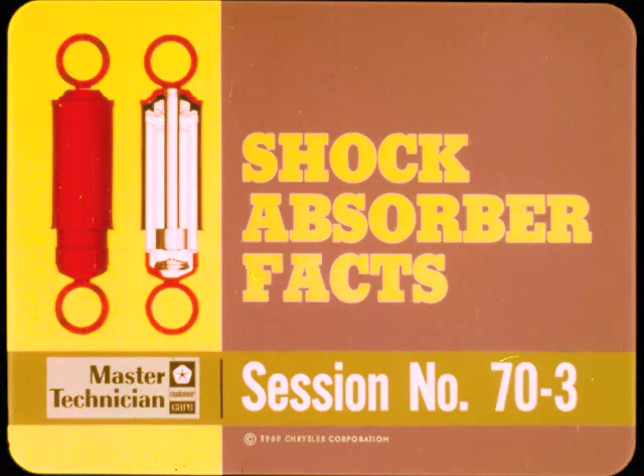Fellas, this month's session should have a little more bounce to it than usual. We're going to cover the subject of shock absorbers, probably one of the most misunderstood parts of the suspension system. Nick is going to give Fred a thorough lesson in the theory of operation, testing, and servicing of shock absorbers. I think Nick's about ready to start, so why don't we join them and maybe learn a thing or two ourselves?

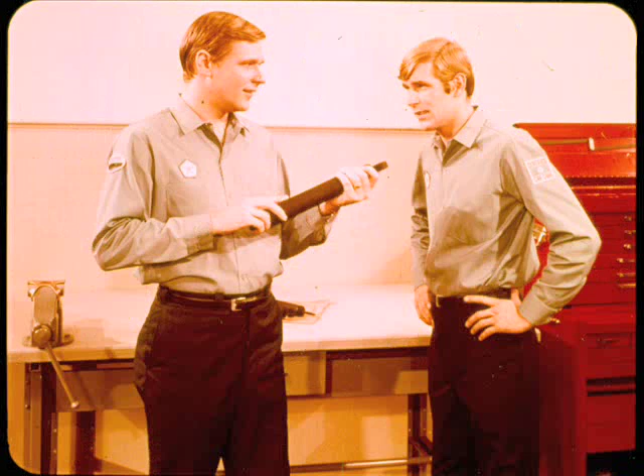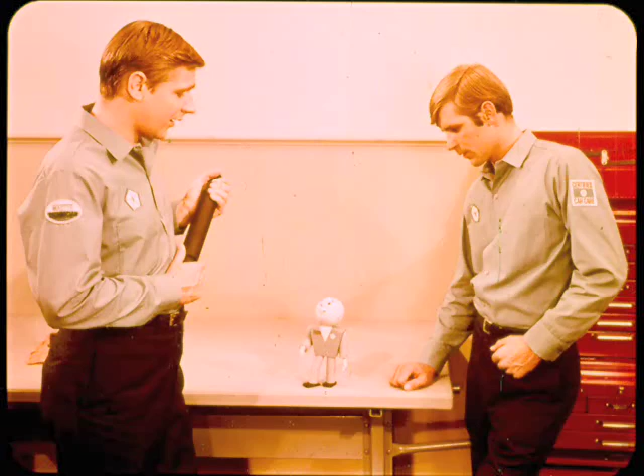The shock absorber is really not a complicated part, Fred. It's just that most people don't really understand what the shock absorber does, how it works, and how to test and service it. Hi, Tech. I'm glad you came along. If you're up to your usual stuff, I'm sure I won't leave anything out. And I'm sure you've got your ready supply of warnings and helpful hints. That's why I'm here, Nick. So you can continue with Fred anytime you're ready.

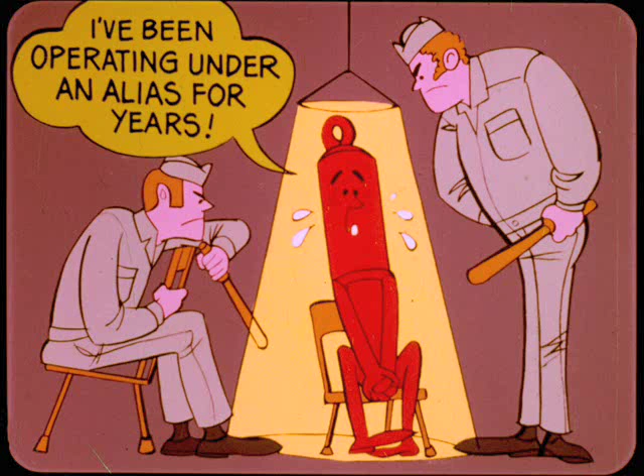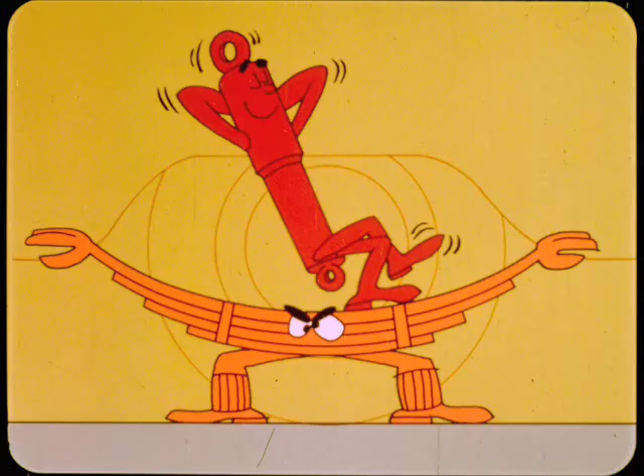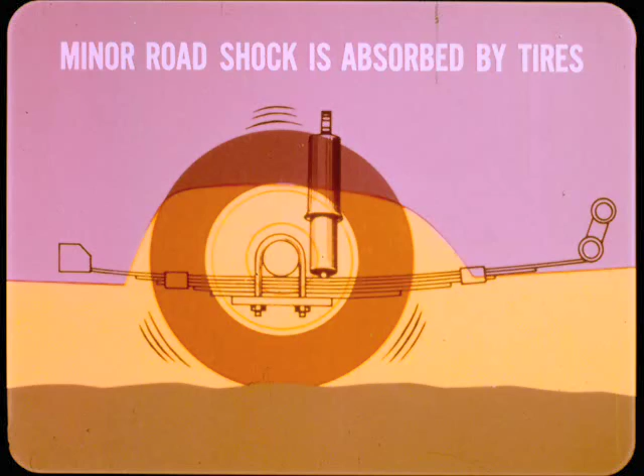Okay, Tech. I think the first thing to clear up is some of the wrong ideas a lot of people have about shock absorbers. For all practical purposes, the shock absorber doesn't live up to its name. It really doesn't absorb shock at all. On the other hand, some owners think that if a shock absorber is damaged or has lost its fluid, the car will sag. We all know that the shock absorber does not support the weight of the body. This is done by the rear springs and front torsion bars. Although some of the minor road shock is absorbed by the tires, the suspension system does the main job of absorbing road shock as the wheels roll over bumps or into holes in the road.

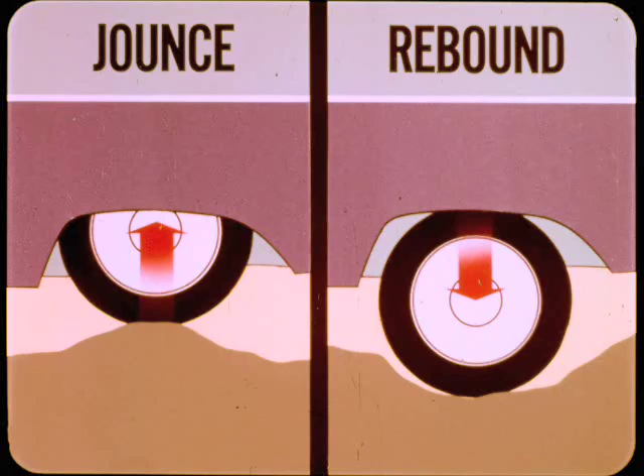Basically, there are two spring movements that occur when the wheels hit any irregularities in the road surface. If the wheel moves upward toward the body, it's called jounce. When the wheel moves down, away from the body, it's referred to as rebound. Jounce and rebound occur whenever enough force takes effect to flex the spring.

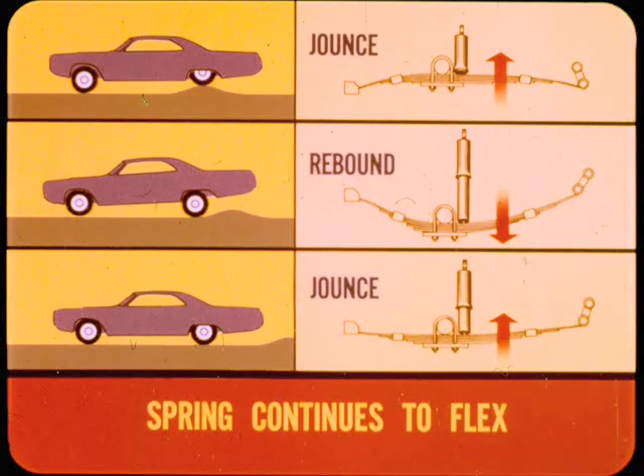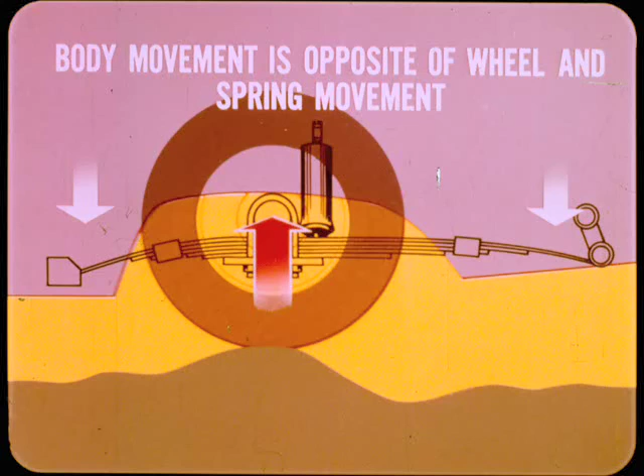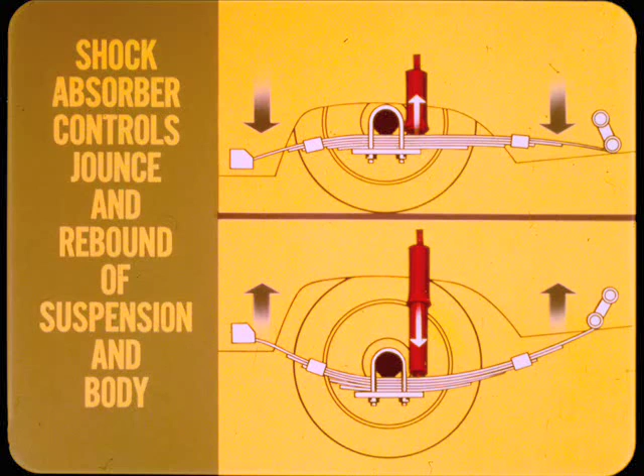The spring continues to flex in opposite directions until the force is completely dissipated. If a large enough load is applied to the car suspension, the spring reaction is transmitted to the body. Body movement is, in most cases, opposite of wheel and spring movement. When this happens, the weight of the body then adds to the spring action and makes bouncing even more difficult to control. Controlling suspension and body movement is the real job of the shock absorber. The shock controls the jounce and rebound of the car's suspension and body. It acts as a hydraulic snubber to dampen spring action and retard body movement.

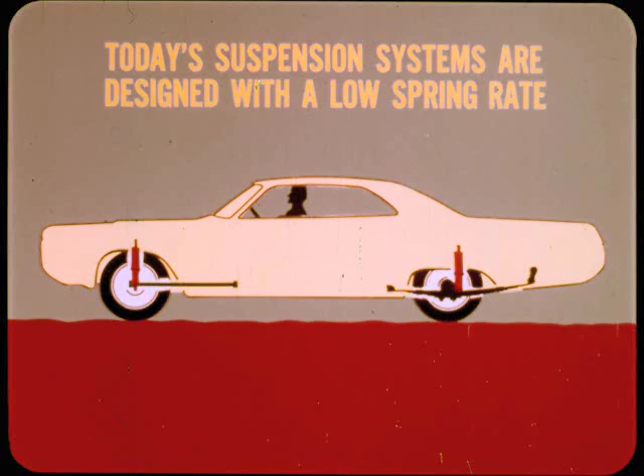Today's suspension systems are designed with a low spring rate to give what is generally referred to as a soft ride. A low spring rate simply means that it doesn't require much of a load to flex the spring. On smooth pavement, today's standard springs are flexible enough to allow the wheels to follow slight irregularities without transmitting their movement to the car body as a road shock or harsh ride.

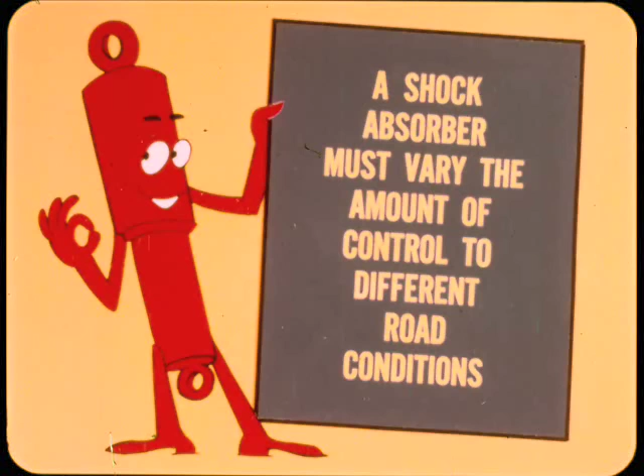Well, with a low spring rate, won't the car bottom if you run over a good-sized bump or a chuck hole? You're right, Fred. And that's why shock absorbers are so important to today's suspension system. The shock absorber must not only provide snubbing control, but must also vary the amount of control to different car speeds and road conditions. A modern piston-type hydraulic shock absorber is designed to automatically provide the right amount of resistance for all normal road conditions.

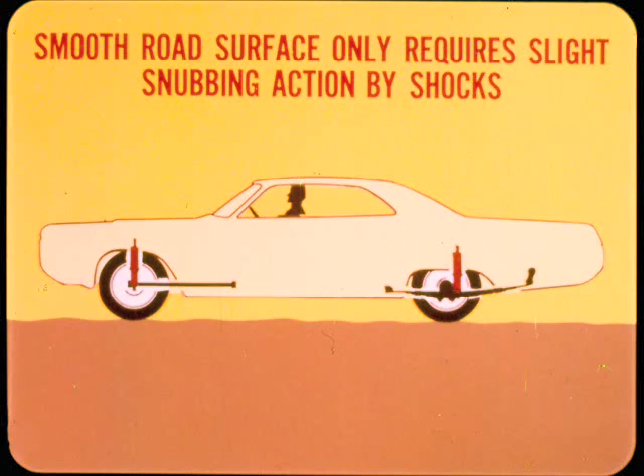For example, a smooth road surface only requires slight snubbing action by the shocks. Therefore, on smooth pavement, suspension and body movement is slight. Nevertheless, it is necessary. Obviously, rougher road surfaces require stronger snubbing action by the shocks to keep body and suspension movement under control. The shock absorbers must automatically increase their resistance many times more to cushion or dampen the increased spring action. You know, I can't understand how the shock can adjust the amount of resistance or the snubbing action to the amount of spring action.

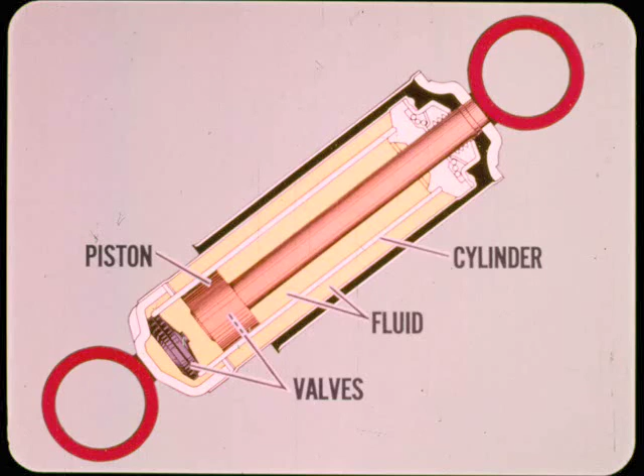I was just about to show you exactly what happens inside a shock absorber, but I'll answer your question first, and then you can see how it's done. A shock absorber is basically a piston within a cylinder filled with hydraulic fluid. The action of the piston forcing fluid through a restricted passage or valve achieves the damping effect. The damping effect is caused by the back pressure built up as the fluid is forced through a small opening. The pressure builds as the velocity or speed of the piston increases.

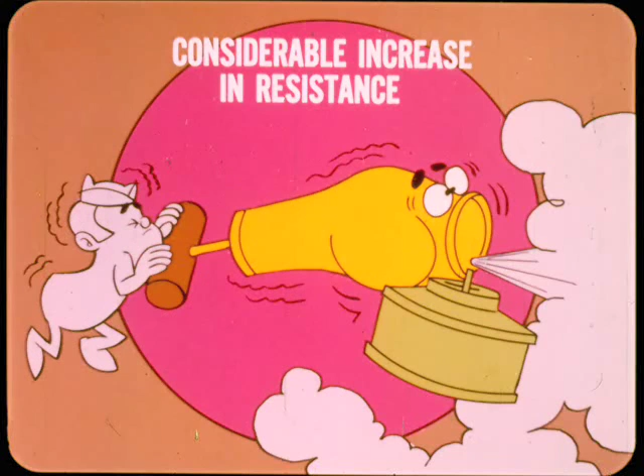The best comparison of this is a hand-operated bug sprayer. If you pump the handle slowly, there's very little resistance. On the other hand, if you pump the handle a number of fast strokes, you'll be able to notice a considerable increase in resistance. The shock absorber functions pretty much the same way. The faster the piston moves, the more snubbing action you get from built-up pressure or resistance.

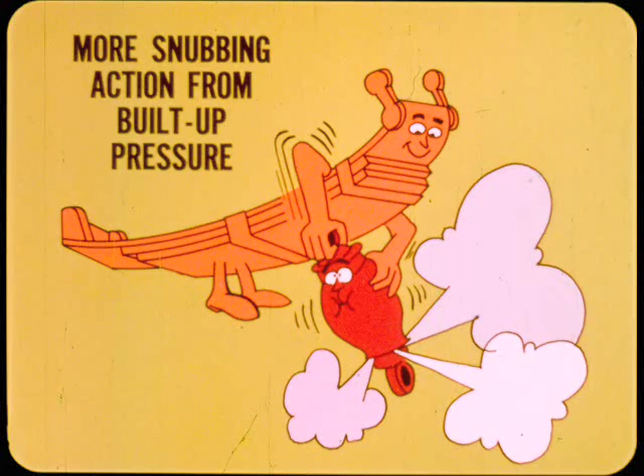Before we go any further, let's take a look and see if I still have that cutaway shock absorber. We'll start with the body of the shock.

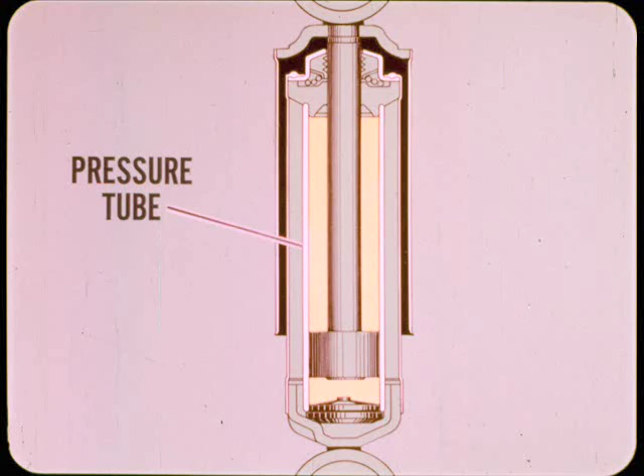The body of this type of shock absorber usually consists of 3 concentric steel tubes. The innermost is the pressure tube where the actual snubbing action is performed. Incidentally, the inside diameter of the pressure tube is the same as the size designation of the shock.

The second one is the reservoir tube, which holds a supply of fluid, and the outer one is a shield to protect the extended piston rod.

In some cases where the piston rod extends into a protective housing, a shield is not attached to the shock. This usually occurs on front suspension systems rather than rear.

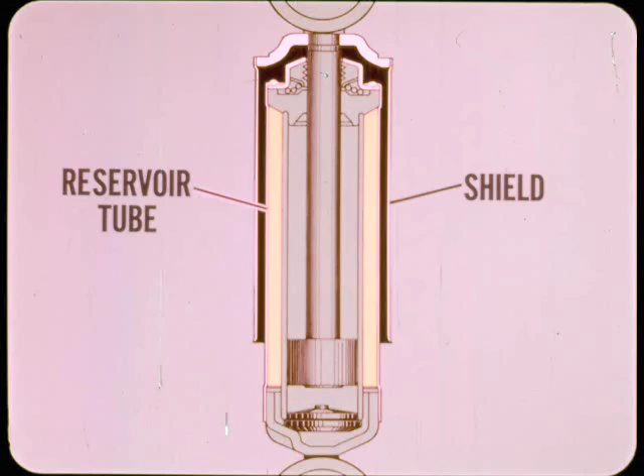At the bottom of the shock is a ring or mounting eye welded to the reservoir tube for connecting the shock to the rear spring clamp or lower control arm on the front. The top of the shock can have either a mounting eye or a threaded stud.

Internally, of course, there's the piston rod and piston. Piston movement is what forces the fluid through the valves to produce the snubbing or damping action.

There's an oil seal above the rod guide at the top of the shock. The oil seal prevents leakage from the pressure tube and maintains pressure within it.

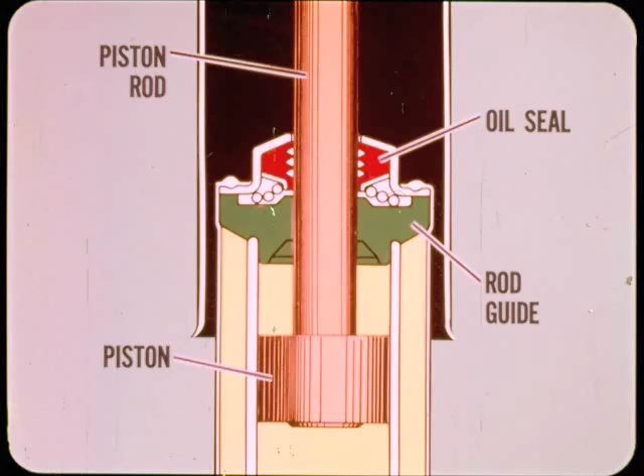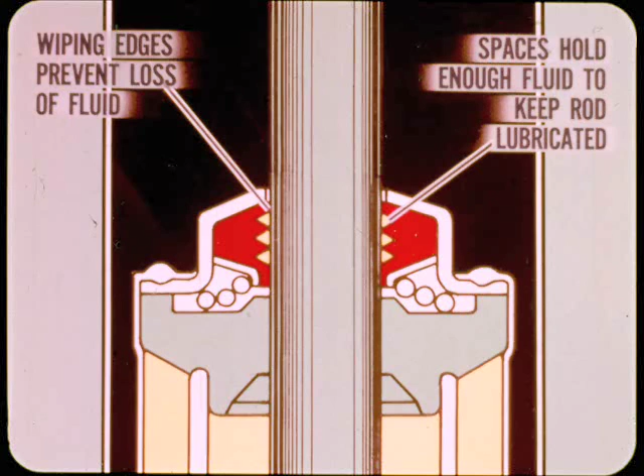The inside of the seal has 3 wiping edges, which prevent loss of fluid as the rod is extended. Between the wipers are spaces that hold enough fluid to keep the rod lubricated. On the compression stroke, the seal pumps the fluid from between the wipers into the pressure tubes.

When a shock is leaking fluid, does it mean that the seal is worn out and should be replaced? A certain amount of seepage is not abnormal, Fred, but it doesn't automatically mean that the shock should be replaced. I'll explain that in more detail later. Right now, let's take a look at what actually causes the snubbing action.

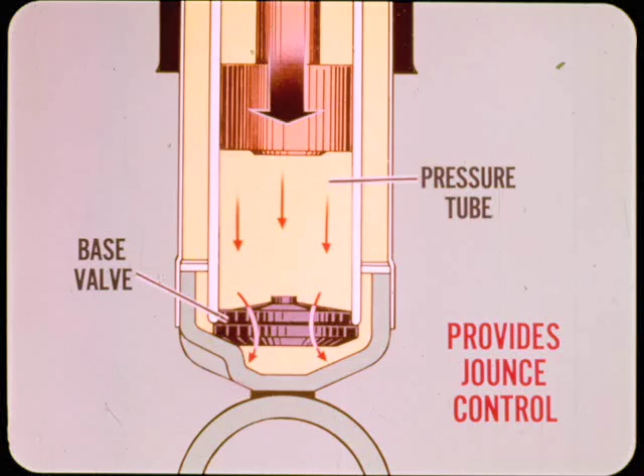There's a valve at the bottom of the pressure tube, which is generally referred to as the base valve. This valve provides about 90% of the control in a jounce condition. Valving within the piston provides the remainder of the control.

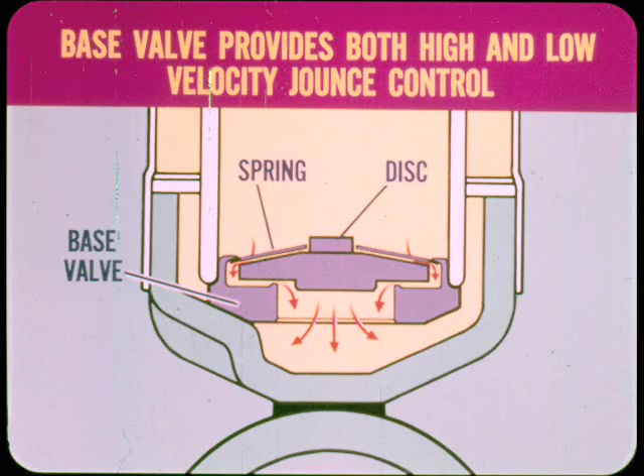The base valve provides both high and low velocity jounce control. The base valve varies the amount of control through back pressure alone. The faster the piston travels, the more control you have. If you remember the bug sprayer, you know what I mean.

On rebound strokes, it's a little different story. If the fluid flow from the reservoir through the base valve is great enough, the disc lifts to provide a larger orifice. So, at high or low velocity, the base valve doesn't offer any rebound control.

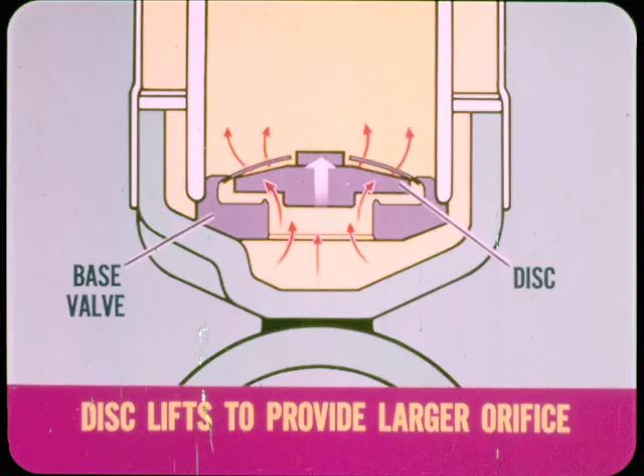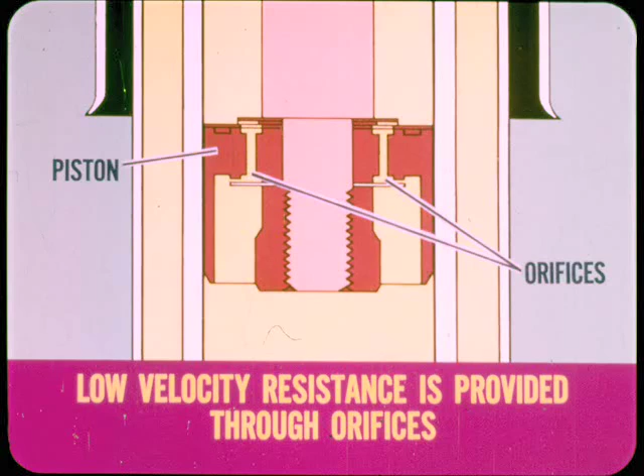Rebound control is accomplished through valving within the piston. However, there are 2 phases of resistance. Low velocity resistance is provided through orifices much the same as the base valve.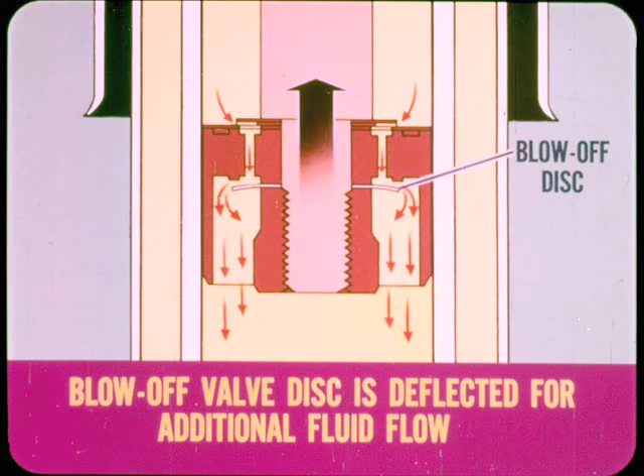As the piston velocity increases, a blow-off valve disc is deflected for additional fluid flow through the piston. This prevents the rebound action of the body from becoming too harsh or stiff.

If more resistance is needed to dampen high-velocity motion, why is the blow-off disc used to provide a larger opening? Wouldn't that decrease the resistance? Now that proves you're paying attention, Fred.

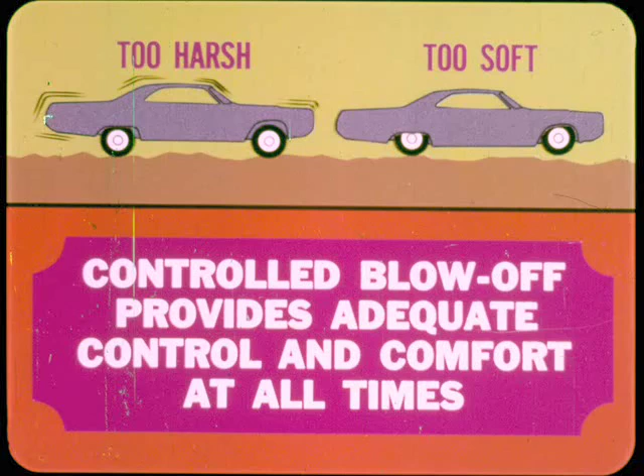I'd better explain that. The pressure does increase naturally as the velocity increases. However, on high-velocity jounce or rebound strokes, the resistance would be so great that the harshness of the ride would be uncomfortable. If a larger orifice were provided for high-velocity shock action, the shock action would be too soft or mushy at low-velocity operation. So, by controlled blow-off, adequate control and comfort are achieved at all times.

I think that by now Fred is pretty well convinced that the shock absorber is pretty important to the car's ride. I think he will agree that today's shock absorbers are designed to handle the job. Most people don't realize this and are too quick to blame the shocks when the car's ride is not what they think it should be.

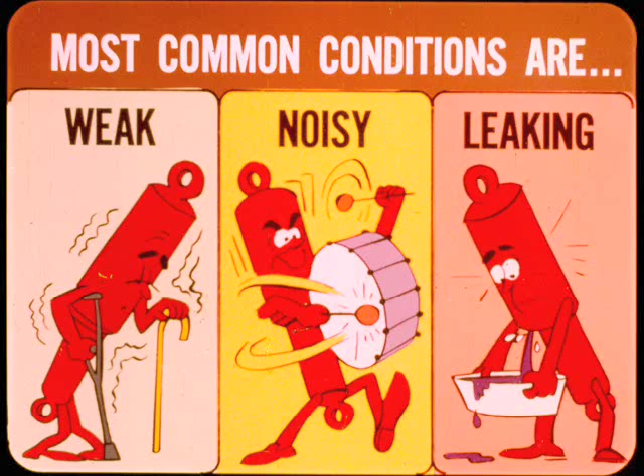First of all, let's talk about the type of shock absorber problems you're apt to run into. The most common conditions are that shocks are either weak, noisy, or leaking. Virtually all of today's cars are designed to give a soft ride. First of all, because most owners prefer this type of ride, and secondly, improved road conditions allow it.

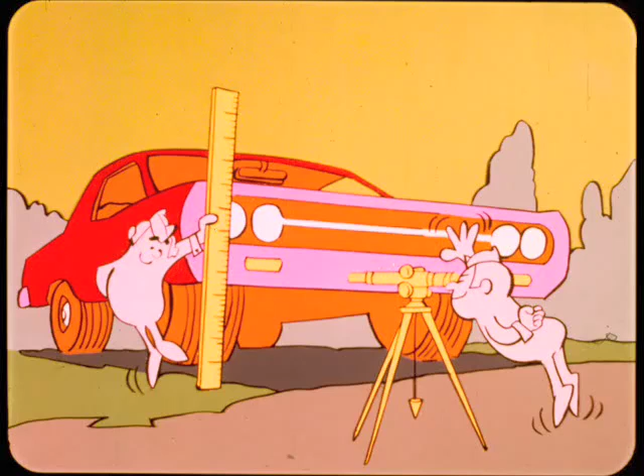However, if the owner complains of frequent bottoming, the problem may be in the suspension and not the fault of the shocks. Be sure and check the front suspension height. After about 5,000 miles, when new car stiffness and friction have been worked out, the ride of a new car may become noticeably softer.

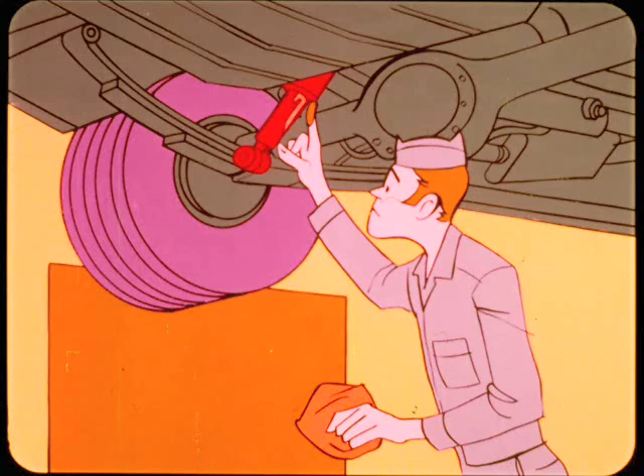The rate of weak shock complaints is also likely to increase in the springtime, when warmer weather decreases fluid viscosity. Springtime is when you may notice what seems to be abnormal seeping of shock fluid. That doesn't mean you won't get seepage at any other time, but here's why it's common then. A certain amount of fluid seepage is necessary for lubrication, but in winter the seal gets a little stiffer and fluid loss will be greater than usual. Actually, shocks have more fluid than necessary, so a minor loss won't affect operation.

How about noisy shock absorbers? The shock may make some noise if the car has been sitting for some time, especially in winter. However, a couple of miles of driving should eliminate the noise. If it doesn't, you should replace the shock.

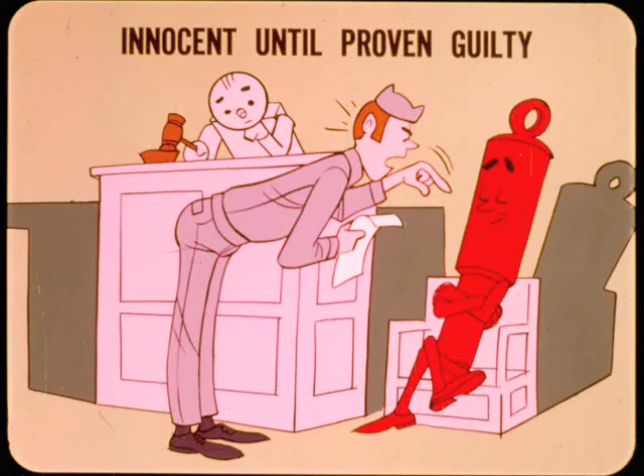But remember, the shock absorber is innocent until proven guilty. When an owner says he thinks the shocks are bad and the only reason he can give is the ride and handling of the car, eliminate all other possible causes before blaming the shocks.

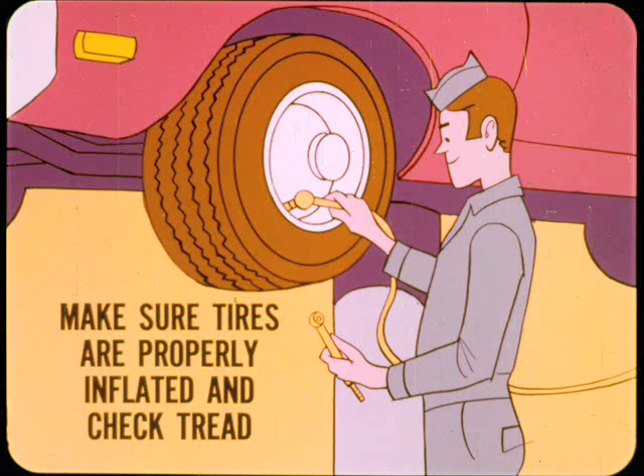The best place to start is the tires. Make sure they're properly inflated and check the treads for flat spots or uneven wear. Uneven tread wear can be the result of improper inflation, incorrect wheel alignment, or unbalanced wheels. The tread wear and the condition which caused it will both affect the ride and handling.

Next, check front suspension height and correct it if necessary, so you won't mistake low or uneven suspension for poor shock absorbers when road testing the car.

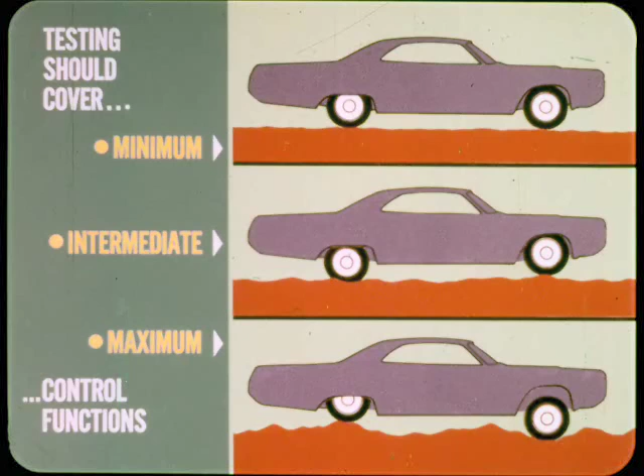Speaking of road testing, the only sure way to test shock absorbers is by making a thorough ride test. Because the shock absorbers must control a wide range of ride conditions, a complete checkout should cover minimum, intermediate, and maximum control functions. I've seen a lot of technicians testing the shocks by bouncing the car.

Seems to me that would save a lot of time. About all this test will show up is a shock that is completely shot or noisy. It won't show up a shock that is only partly effective. The reason is the bouncing you can apply in the shop can only make the shocks work enough to check the least amount of snubbing action.

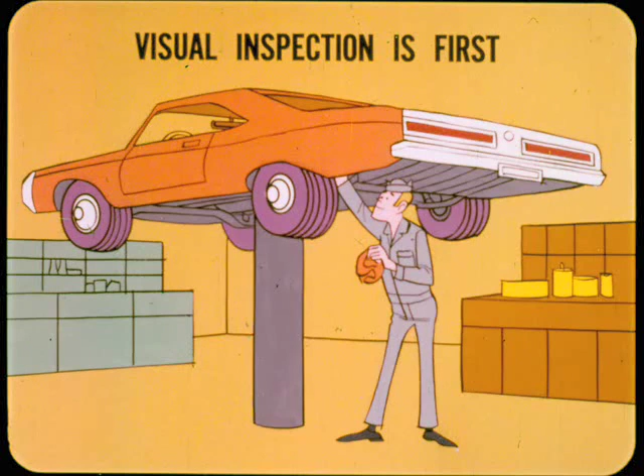To produce the abrupt suspension and body movements needed to check the complete controllability of the shock absorber, it's necessary to test drive the car. Of course, a visual inspection is probably the most practical thing to do first. A quick look under the car will show an extremely leaky or damaged shock absorber.

Tell me, do you or don't you replace them in pairs? The chances of shock absorbers going bad in pairs are few and far between. Except for leakage or physical damage, a shock will last indefinitely. So don't waste your time by replacing a good old shock with a good new one.

How about telling us about that road test, Nick? Okay, Tech. First, pick a route that you can use regularly for all your road tests. Both smooth and rough stretches of pavement are a must to check the wide control range of the shock absorber. If possible, work in a fairly rough railroad crossing—it can be very helpful.

Next, test a car that you know has good ride and handling characteristics. By driving the car at different speeds over the test route, you'll know what to expect if you test other cars of the same model. When making a test run, compare the ride with that of your standard car.

Shock absorber action over minor bumps such as expansion joints shouldn't be harsh or stiff in comparison. The smooth rolling bumps you may find at bridges, street crossings, or low spots should be controlled equally as well. Driving over a smooth rolling bump is an important test.

Good shock absorber action will make the car body level out almost immediately. On the other hand, poor shock absorber action in either the front or rear will cause a pitching motion as you come off the smooth rolling bump.

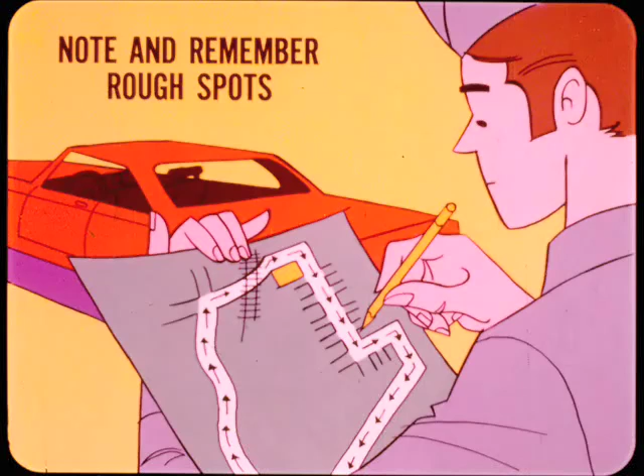Good point, Tech. Be sure to note and remember the rough spots along the test route. If a car with adequate shock absorber action is able to handle suspension and body movement, then any future car which you test should do as well. Once you establish that the shock control is below standard, you have to determine whether the trouble is front or rear and right or left.

The only way to compare the shock absorber action on both sides and at both ends is to make repeated runs over rough pavement to check for excessive hop at each wheel.

You mentioned a train crossing in the test route. What will that prove? A fairly rough railroad crossing will cause abrupt level changes which call for maximum shock absorber control. Driving straight across the tracks, test the front shocks first, then the rear.

A multi-rail crossing is also a good test for suspension strike-through or bottoming. Driving over several sets of tracks can allow violent pitching movement if shock absorber control is poor. Even at low speeds, this movement can cause much the same action as a smooth rolling bump at high speeds.

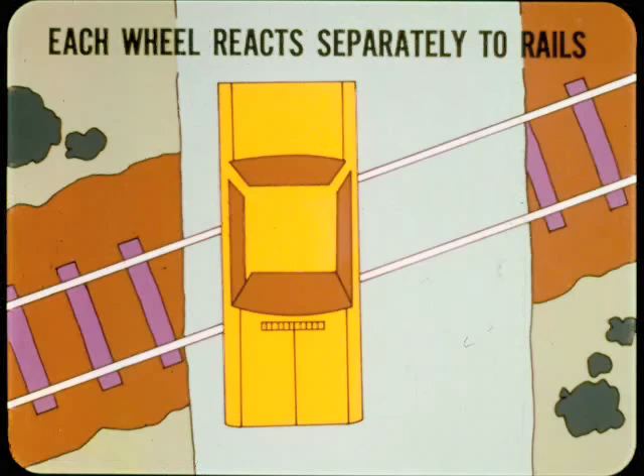Driving across the rails at an angle will let you test shock absorber action at each wheel. Drive slow enough so that each wheel reacts separately to the rails. You'll need a little experience at this test before you're able to spot a bad shock quickly.

If either side has a poor shock absorber, you'll notice that that side has a greater tendency to bounce and will cause a body rolling movement as the car crosses the tracks.

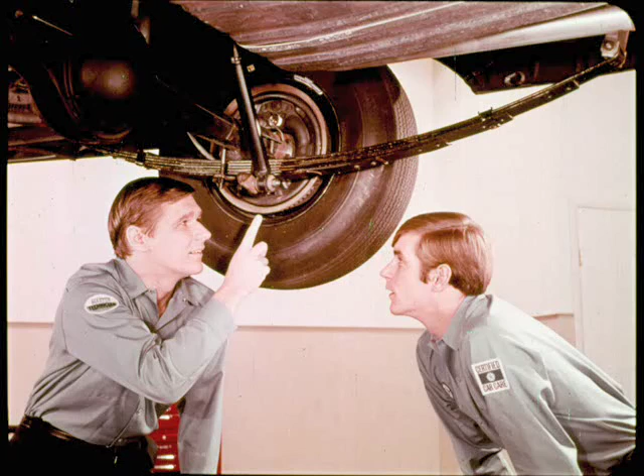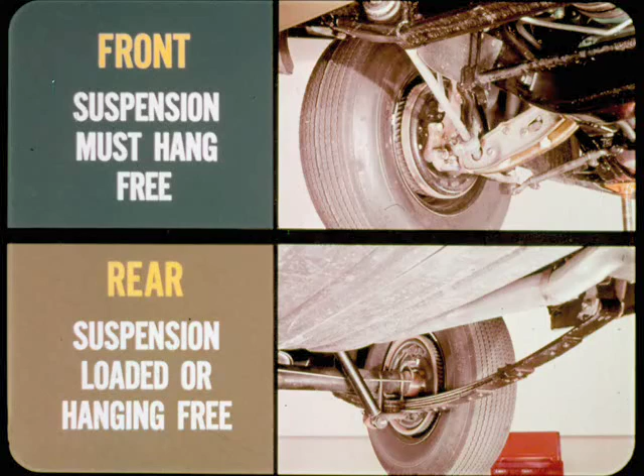What if you thoroughly road test the car and you're still not sure the shocks are at fault? If you suspect the shock absorber, but have any doubt about its condition, disconnect it at the bottom and give it an operational check. To check a front shock absorber, the suspension and wheels must hang free. The rear shock absorbers can be disconnected and hand-operated with the suspension either loaded or hanging free.

As you compress and extend the shock absorber, you should feel a smooth and consistent resistance to movement. Any soft spots in the movement or overall lack of resistance, except near the end of the stroke, is a good indication that a new shock absorber should be installed.

When installing new shock absorbers, always purge the pressure tube so that the shock is not installed on the car in an aerated condition. Air in the pressure tube can make shock action soft, spongy, or spotty. It's also likely to be noisy, and you'll have the owner back with another complaint.

It's pretty easy to purge a shock absorber. Here's how it's done. Hold the shock absorber right side up and extend it all the way. Turn the shock absorber over and compress the shock until it's completely collapsed. Extend and compress the unit several times, at least a half dozen times.

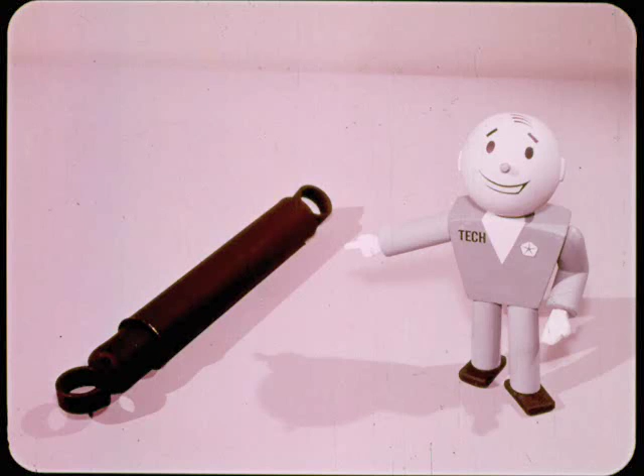What little, if any, air remains in the fluid will be purged after a short period of operation. Remember, always extend the shock right side up and compress it upside down. And when you're ready to install the shock absorber, always extend it in the upright position, never in a horizontal or inverted position. If you do, you'll aerate the shock all over again.

If you remove a shock absorber and plan on reinstalling it, the first thing to do is to invert the shock and compress it. How about installation, Nick?

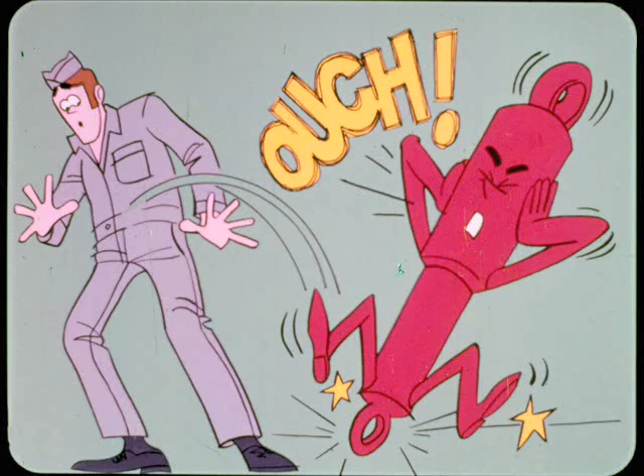Okay, Tech. First, a little warning. Don't ever throw a shock around or get careless and drop it on the floor. The pressure tube could get damaged or the piston rod bent.

There's one thing to remember when installing a new shock absorber or reconnecting one after testing. Always be sure to center the mounting bushing and tighten the mounting nut to the correct torque. It looks to me like that bushing will center itself.

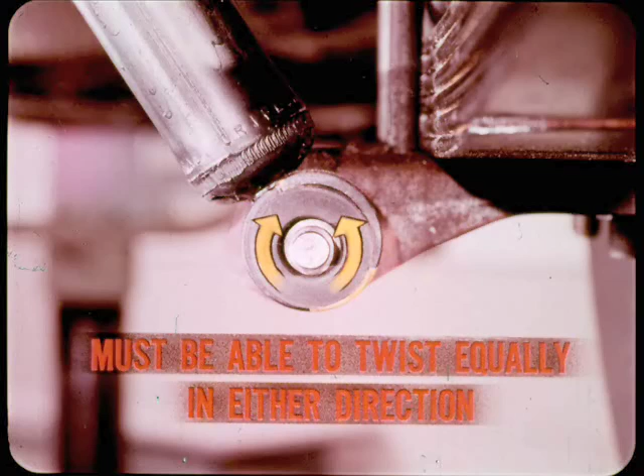I'd better explain. I meant that the bushing must be centered radially in its normal load position. If not, the bushing life can be shortened considerably. Here's why. The rubber bushing in the shock absorber mounting ring must be able to twist equally in either direction from the normal load position to allow movement between the shock absorber and the part it's connected to.

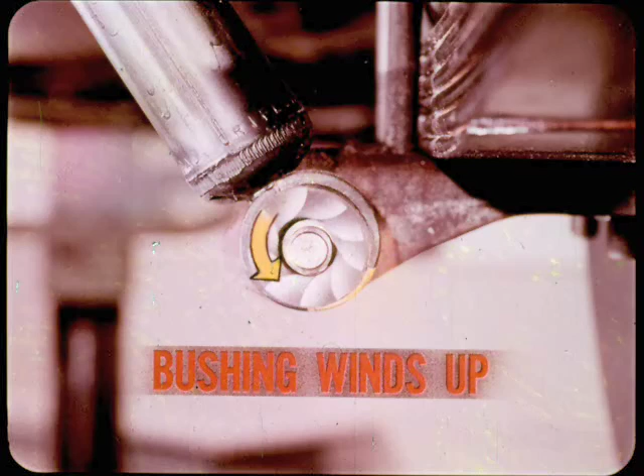This twisting action is known as wind-up. If the bushing mounting nut is tightened when the car is raised off the wheels, the bushing will wind up in one direction when the wheels and suspension return to the normal load position. This wind-up puts a constant strain on the bushing as well as the piston rod and seal, which can shorten service life considerably.

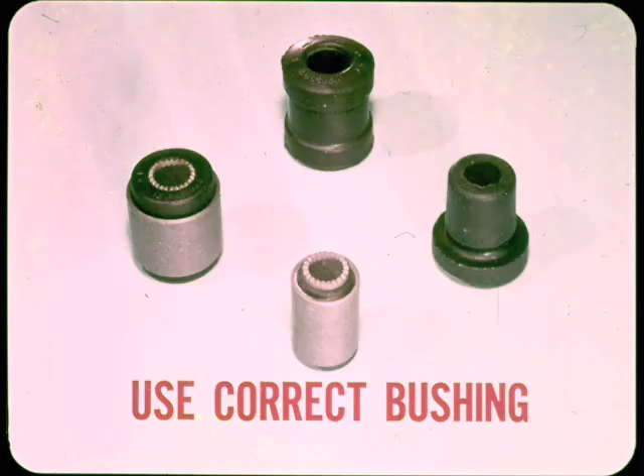Just a couple of final reminders. Be sure you use the correct bushing and never use any kind of lubricant other than water on rubber bushings before or after they are installed. A lubricated bushing may slip and wear out instead of flexing normally.

That's going to have to be the end of the session, Fred, so let's hit the road. Thanks a million, Nick. I sure learned a lot today.